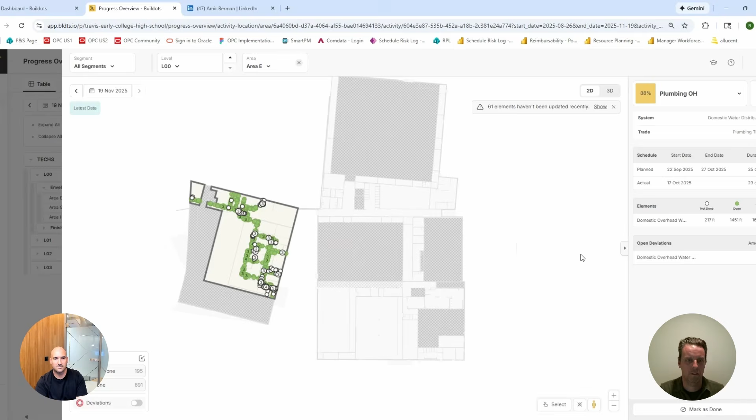Let's keep moving, keep walking through features, because I think this is super interesting. So let's just pick one here - just pick plumbing overhead. So I'm in this area here. I'm going to zoom in a little bit.

Notice that it's not all going to be 3D - we've got our flat view. So this aligns with the WBS and the schedule. Each area on the drawings is lined up in Buildots interface. So now I'm looking at plumbing overhead. I see I've got domestic overhead water pipe here, an element from the model. I have 1,451 feet complete and 217 left to complete.

So here we are seeing the white - the non-green are not complete. So I can click in here and see, but you can see my total quantities. You can see the planned start date from the schedule, the baseline, and then the actual start - the first recorded progress in this area is what it's going to put down as the start date. So it's giving you your schedule.

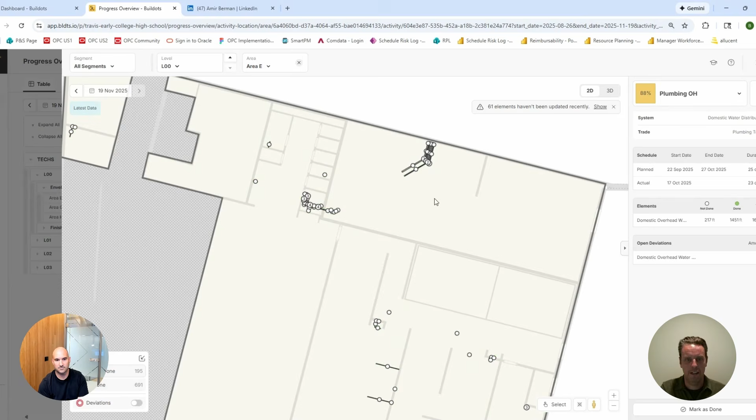Can you uncheck that done on the bottom left so we can just look at the not done? Oh yeah, there it is. Yeah, I mean, that is just like the little things that I always find helpful. This is a couple little cool things - I can turn on this 3D view if you're into that.

And when you start layering scopes in, this 3D really starts to help. I find myself, though, a lot of times in 2D - I just think it's a little lighter. It's taken a while to load this, but it's a lot of data.

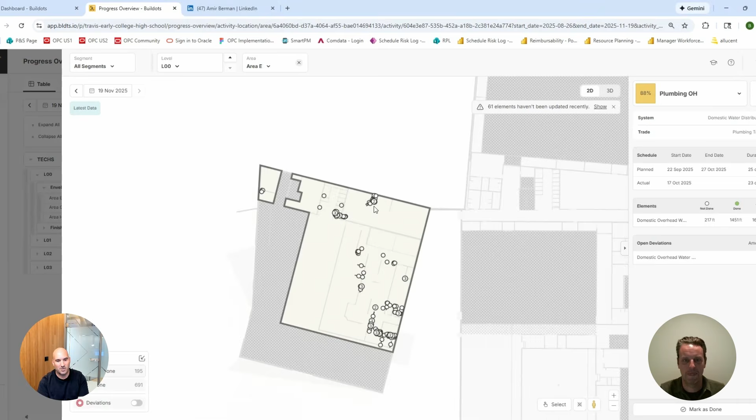There's always that dimension when you talk about tech, which is we can demonstrate the feature in the tech, and please keep on doing that, Brady. The other part is I think we need to talk about what kind of conversation it enables, because, yeah, frankly...

I think personally that present-day construction is almost like - I don't want to say undoable, but it became a bit unfair. I think the magnitude and complexity of our jobs, especially think about a major healthcare project you're dealing with, or any K-12 with a strict deadline, or mission critical work - it became too complicated for people to grasp and control.

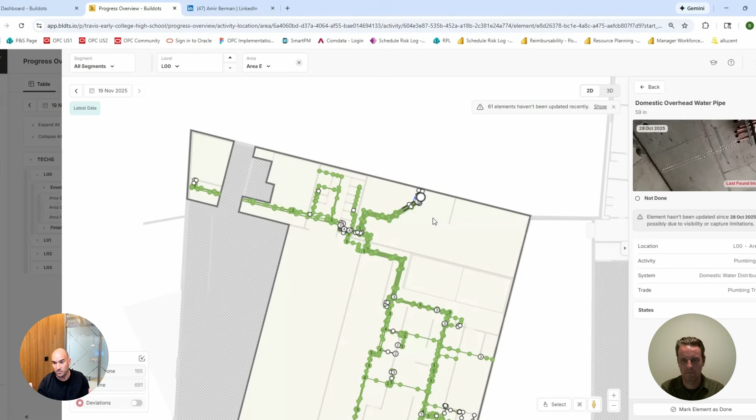And it's so easy to miss the small things. To quote the famous saying, it's a game of inches - your ability to win or lose is really determined by inches. No one is losing by a mile, right? But if you keep on losing by inches week in, week out, eventually it adds up. And it's so easy to miss on that kind of piece of overhead pipework. Anyone could have missed it.

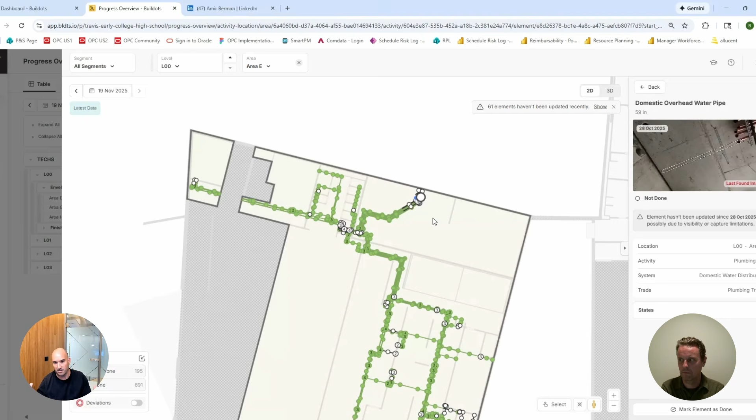And when you try to aggregate on the big picture, all of a sudden you can see that, oh my God, we've been under-delivering by just like 10% on a weekly basis for the past 10 weeks. And if you catch it too late, eventually it becomes a snowball - everyone will know that you're behind schedule, everyone will know that we're missing those pieces on all floors.

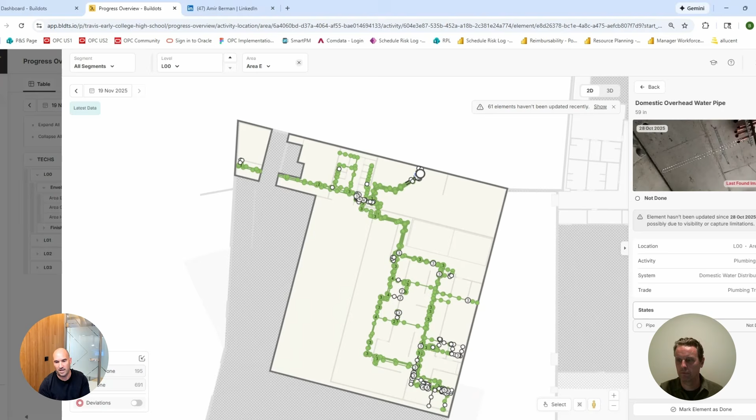And the key point is that if you can find those missing pieces, or find out that you're behind schedule by just a bit on the second week of the job, it becomes almost like a day-to-day thing for you to solve, instead of waiting for week 10 or week 20 where it's a bit too late for you to recover.

Oh yeah, that's where I was looking at this one. Sorry, Brady, can you go back and click the done off, and just focus on that.

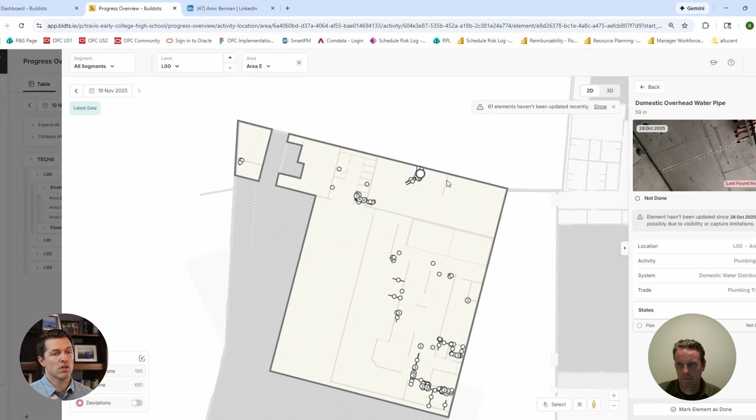The not done - I mean, you talk about finishing out a room, an activity that stays at 99% or 98% for weeks while you're waiting to figure out what's happening. You'd have to walk out to the field, get your phone out, take photos of all the pipes that aren't done yet, and try to understand how that plays into the bigger picture. This is automatic, so you're saving a ton of hours on that sort of analysis. I think that's super interesting.

And then you can zoom out and understand how the metadata plays into this and everything that's tracked as part of it. Now, I did see - click on one of those dots, because I think it shows you the last scan.

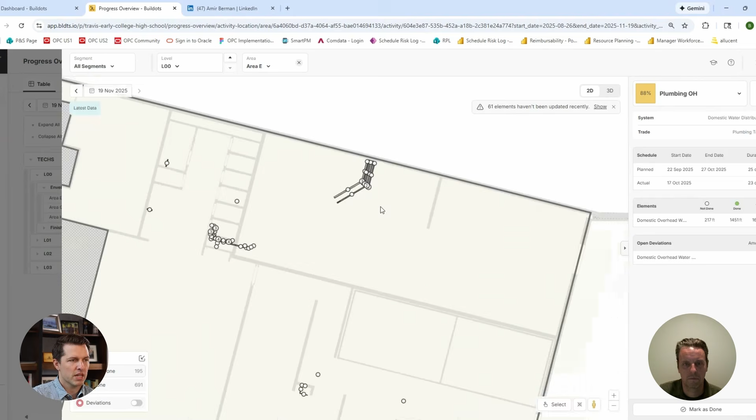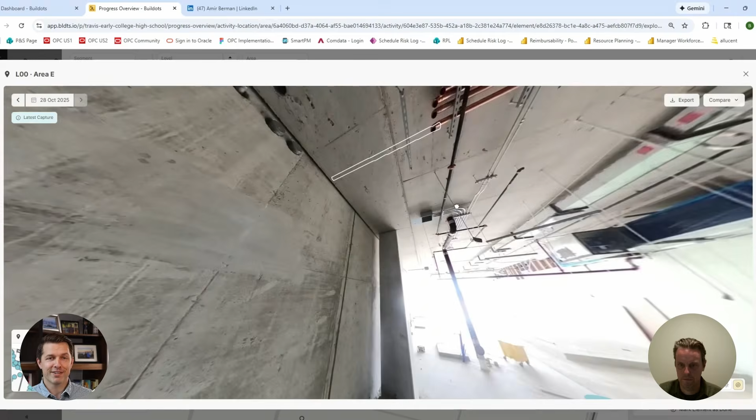Yeah, so that's another cool one where you can actually see - here is the ceiling, this is what should have been connected, and this is where it's not connected. Going back to your point on having those conversations - exactly, that's a very straightforward conversation of, hey, I got these four pipes that need to be connected. Here's a screenshot that took 30 seconds versus some of the cycles you'll spend over and over.

Here's a question for you, Brady, as my brain starts to fire this morning - do you bring your subcontractors into the portal as well, or is this kept at arm's distance, or is it a mix of both? Where are you finding success in that?

So again, new process for us. We've been working with this for a couple of years, but it's a new process for this team because they just started. The intent here is to have weekly meetings, bring this trade or all of the trades together, and look at these views and have a quick discussion.

The plumber may quickly say, well, this isn't done because the wall framing wasn't put on - I can't run them down the wall, so why would I finish that last 90 and run down the wall? Then you can start asking the question, why isn't the wall done? And how else were you going to get to that conversation?

You're going to go walk the job, you're going to go see it maybe two weeks later and say, hey, let's get people together and huddle up here and figure out how to get this moving. It's an RFI that's holding this wall up, let's say.

Making that scenario up, but I like that - always pointing it back to design's fault, maybe. There's one person we're going to blame - it's the person who's typically never in the room, and it's the design team.

But it's not a blame thing, it's truly about fixing it - let's get it going, right? Because otherwise, what they would do is turn around and blame the owner - the owner hasn't given me approval to release the RFI yet.

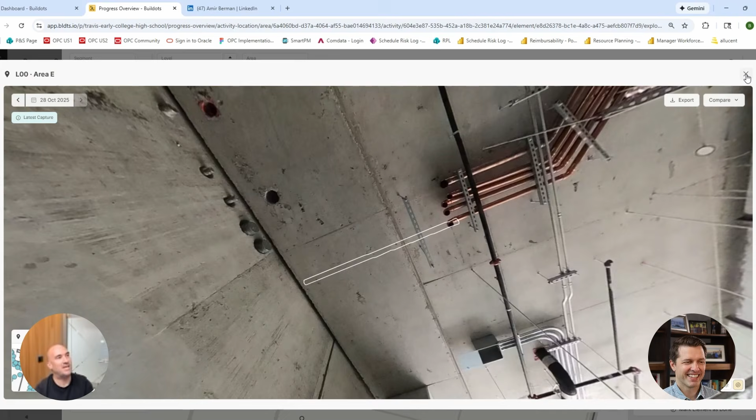Sometimes it's a blame game, and sometimes when teams are more mature and cooperative, it's about trying to find the needle in the haystack and saying, hey guys, that RFI we've been waiting for a while holds us back, and this is what it holds us back because we need a decision right here, and that decision for these six pipes not being installed is holding up the next trade, which is behind schedule, and Buildots will tell you that you're like 10 weeks on a projected delay trajectory. So it almost acts as an outcome tool that says, whatever happens, no matter the reason, no matter whose fault it is, this is what happens, this is what we need to solve.

So another thing, Mike, it's very - what's the word I'm looking for - matter of fact. It's just, this is what happened, and it takes maybe some of the emotion out of it.

There was probably like 14 other widget sidebars.

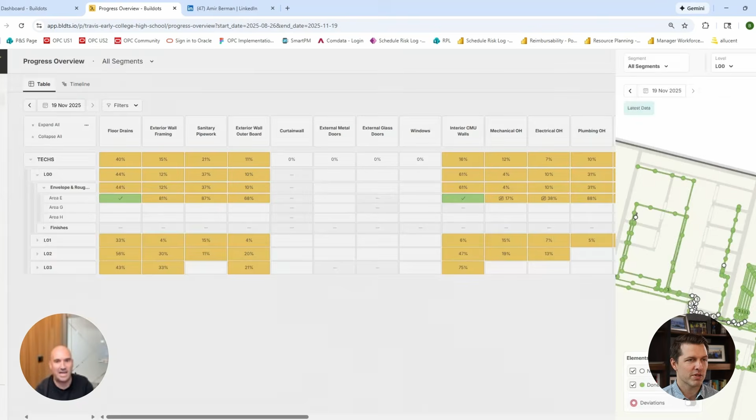And so we can definitely stay in this mode for a long time and geek out on it, but let's dive into a couple other capabilities. Maybe how about we go back now to the dashboard, now that we understand the context, and go into the model.

So now that we've got the concept of progress tracking, and we figured out the bird's eye view of progress per activity per location, and we saw the floor plan and the missing elements, I think one of the key understandings we've had over the past few years is that sometimes people need a bottom line. You need a bottom line that says: are we on track? Yes or no? Just give me the answer.

And if you're on track, good job, keep on doing what you've been doing. But if we're not on track, and I'm going to know that I'm not on track 12 or 16 months from now, I want to know it now, because if it's a small course deviation, I want to fix it right away. So we've added what we call a delay forecast. Maybe it has a negative sentiment, but it's a straightforward answer that says, hey, you're on time or not. And if you're not, we'll tell you: if you continue this way until the end of the job, this is what's going to happen.

So some activities you'll be like 9 weeks behind schedule comparing to your P6. And in some cases you'll be like 17 weeks behind schedule.

Walk me through a little bit of background on that, because I know my quantity tracking purists will be like, Amir, what is the formula you're using to lay out the quantities? So you have a P6 activity, it spreads, it has a start and finish date. How are those quantities spread over that start and finish date? Is it just a typical linear spread, do you adjust it?

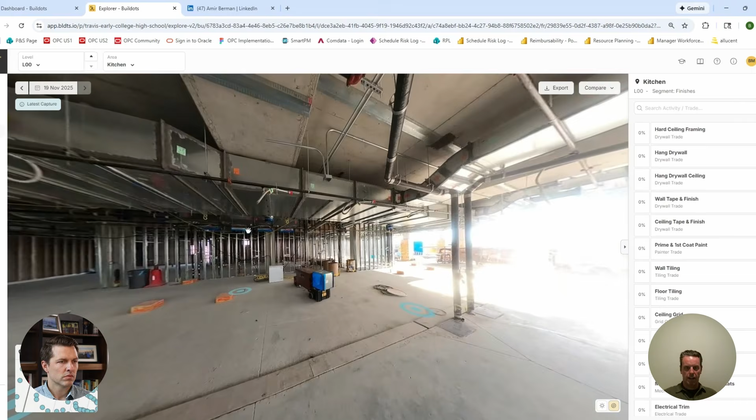Absolutely. Just keep moving through a few other things. I really like this simple tool here, it's an explorer, and I can cruise around the building. There's none of this work going on here, but I know what space I'm in. This is truly the imagery reality capture piece, but it's pretty helpful just to be able to do that.

And pretty much anyone with a couple minutes of training can go walk the job site for you, right? From what I understand, yeah. So that's the thing - we do a capture once a week, and we usually have 2 or 3 people on the project who are doing the capture, and they follow this path. The capture itself, I believe, is relatively simple to complete.

But yeah, once a week is a pretty good cadence. We do have some jobs that are doing it twice a week - if you've got more density, more layers of systems, you want to be on top of it a little more. One thing I didn't show is that if there are layers of systems, and let's say you missed a pipe running through above a duct, you can still manually check it complete. You can do these things from your app, or from the desktop.

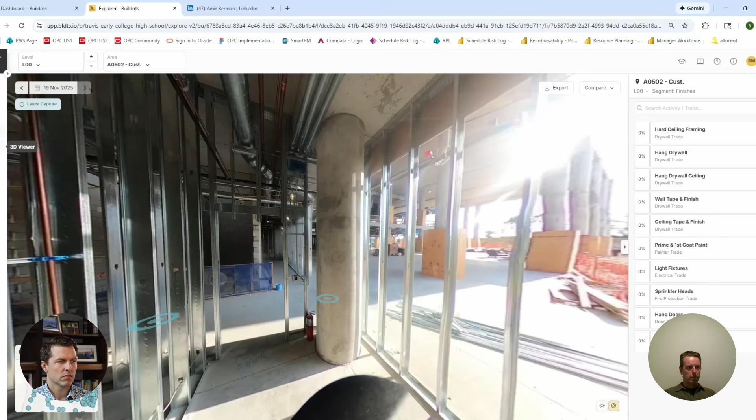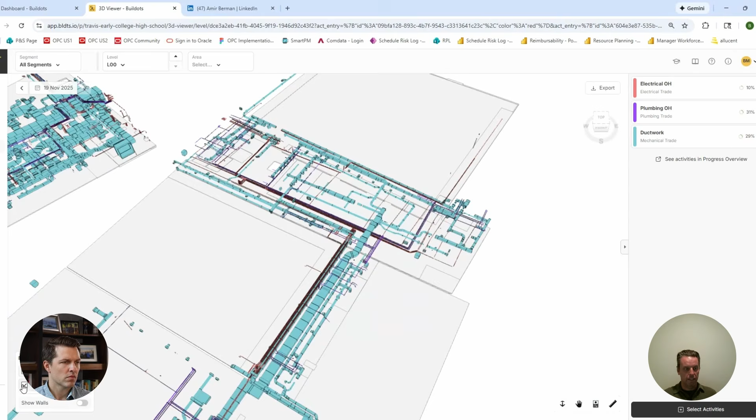This is another one I really like. I should have set some presets here, but I can go now, let's just look at electrical, plumbing, ductwork, because that's what's going on. I think this tool is pretty powerful. It's showing us now what's not done, like you said. There it all is. So now I can turn on what's done, I can look at that, I can see the work that's completed. So if you go over here, you can see the gray is not done, the colored is done.

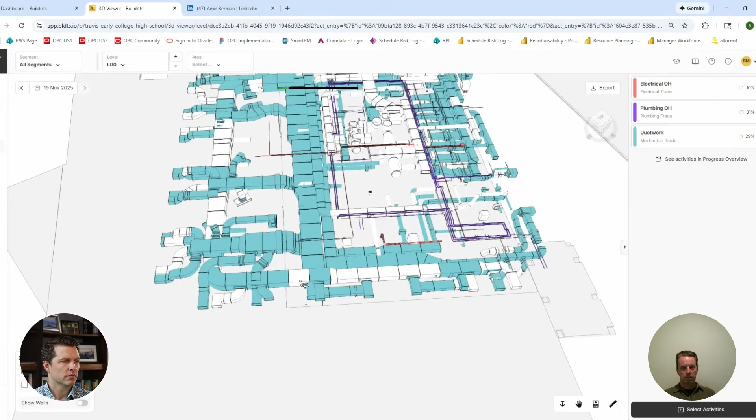If I could navigate a model, but that's not why they pay you the big bucks, Brady. That was not my specialty ever.

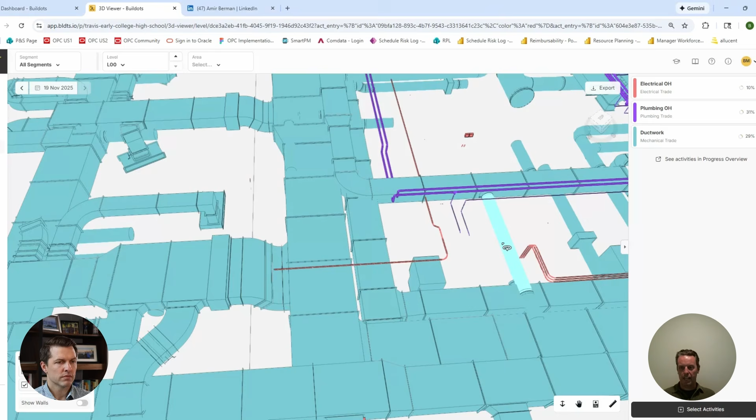So this is pretty neat. You can just flip the viewable, and you pick the scopes that you want to see, the activities. And this is great for a scheduler doing an update. I don't have to go wait to call someone. They're out in the field, they didn't give me an answer. If I'm a remote scheduler, I can fly through here, I can get the rest of the answers I need, and I'm done with my update and ready to go sit down with the team.

Brady, do you see this enabling more remote schedulers in the future where maybe they are not necessarily there every day of the week, but maybe they kind of fly in on a monthly basis if they're creating some owner level deliverables? That's another thing, that's on the smaller jobs. You may not have the budget for a full-time scheduler or a need for one. So do you see that kind of help augmenting JE Dunn's resource pool a little bit?

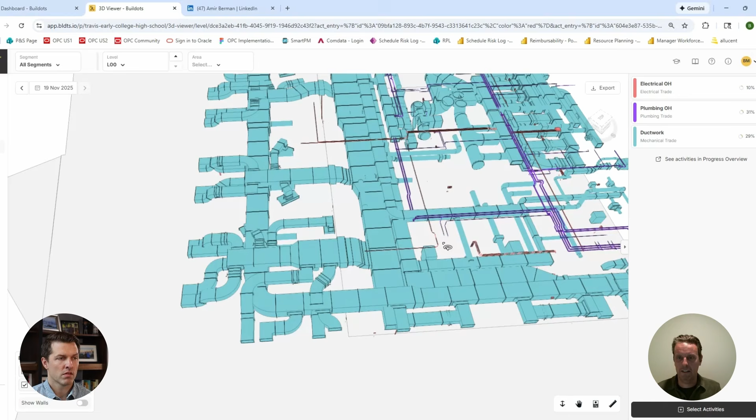I think it enables it for sure, it helps make it happen. We still believe that the team relationship happens in person. You're going to limit yourself, obviously, but let's face it, it's a reality - we're short on resources, this can only help. A lot of times scheduling ends up doing a lot of work that involves going out and walking the site, while it's super important, but if there's a time constraint and you need to get something out and done, you can go get factual, accurate information from here. It's only making your job more efficient, so I don't see the downside.

Yeah, completely agree. I think what else we got? I think we hit most of the things.

It does have some neat work planning tools that show you areas that are ready for work. I haven't really messed with this too much, but it picks and shows you in the graphic the areas that are ready for the trade to go in and work, so you could put an actual work plan together. This could help with your weekly work plan meetings - pull this up to validate that work truly is ready. It's not just people saying it's ready and planning for it, but you can actually validate it through Buildots.

So yeah, and Amir, I saw Dot in one of those windows. Wouldn't be a great conversation if we didn't talk about AI. Somebody's got to keep talking about it to keep this economy afloat. That's right, walk me through it.

I know there's a ton of AI going on the back end with the stitching together of the 360 photos and the model, and a lot of how you guys do that initial integration. But what else is either on the roadmap or in play, or tell us maybe a little bit about Dot, and then we'll answer the rest of those questions.

All right, let's start with Dot. So obviously Buildots has been around for ages. And when we talk about AI, there's a lot more than just LLMs - there's computer vision and a bunch of other things that we've been developing. On the Dot front, I think like many other companies, we figured out that there's just an opportunity for another way to consume the data.